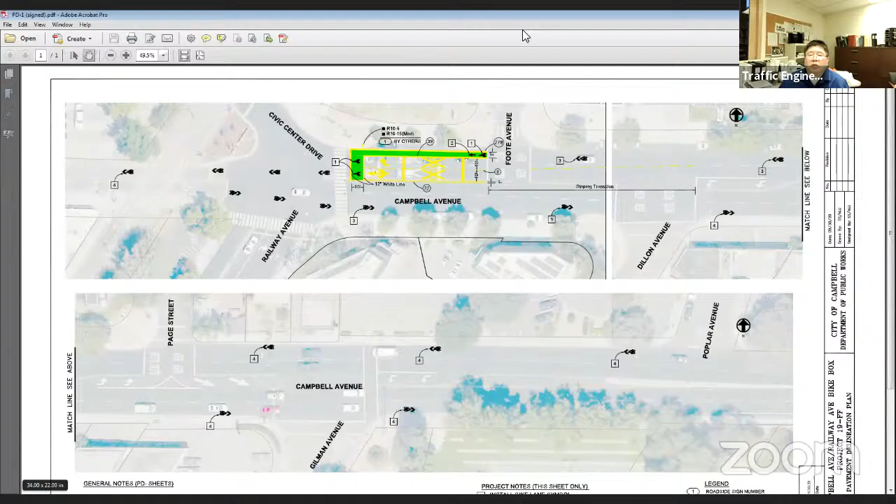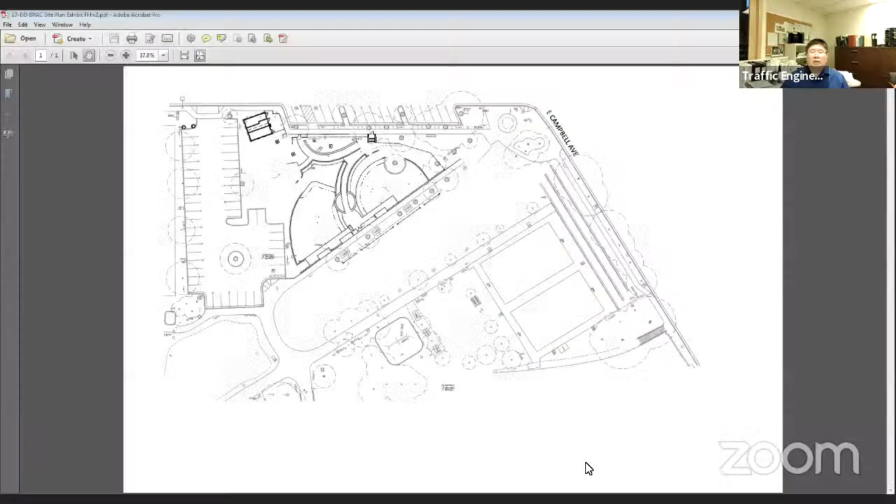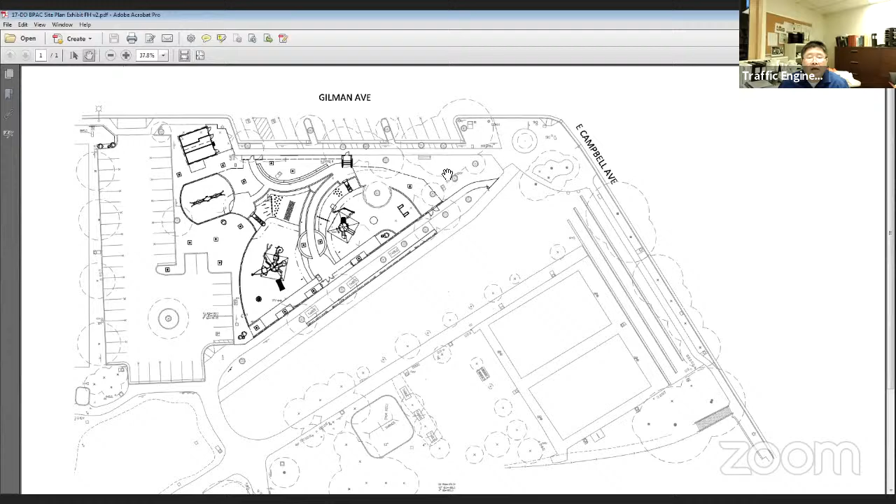And this will be for the Campbell Park, Campbell Park bicycle pathway. Okay, do you see, if this is Campbell Avenue in front of Campbell Park, and this is Gilman Avenue at the top of the sheet, do you all see that? Yes. Okay, I'm going to zoom in to show a little bit more.

What we have planned here is, closer to Campbell Avenue, there's a path that will be built by our maintenance staff that will be bike only, that will bypass this playground area. There will be a separate path for pedestrians to get to this area. And we're looking for some feedback. What we want to do is communicate to travelers that this path is for bikes and this path is for pedestrians. We were thinking of, at a minimum, having something on the pavement, some kind of marking to show the difference.

Pedestrians here versus bikes here. In between, we might have arrows pointing in each direction to make it clear that this is not a unidirectional path. You could encounter somebody in the opposite direction. I believe it's 8 feet wide. It's going to be 8 feet wide.

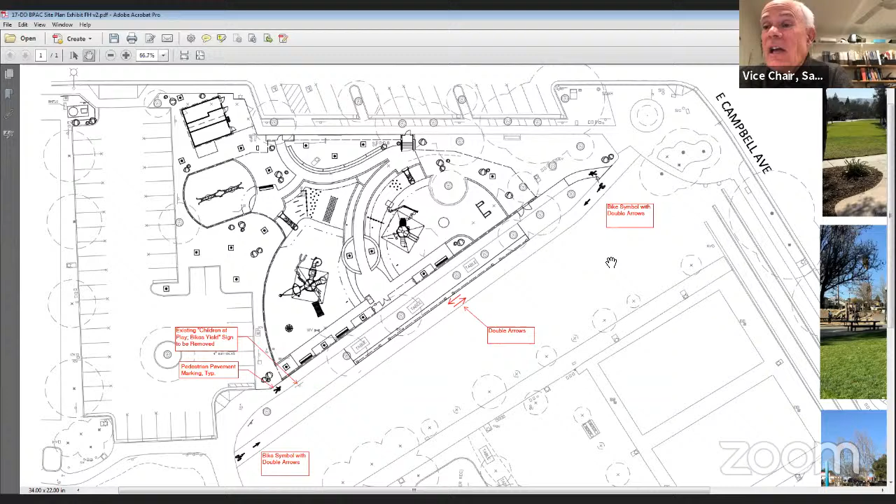So maybe a dashed yellow line. Okay, and it works for cyclists too, reminding them that it's not just that they enter, but that they stay on one side because somebody might be coming at them, or at least keep their eyes open. That's a good point.

I think I'd try it with striping, and if that didn't seem to work and you got people saying they're always getting conflicts, you could always put up a two-way sign or a bikes-only sign. We wouldn't want to jump to signage just to keep it as clean as possible and as few poles out there. But yeah, this is Barton.

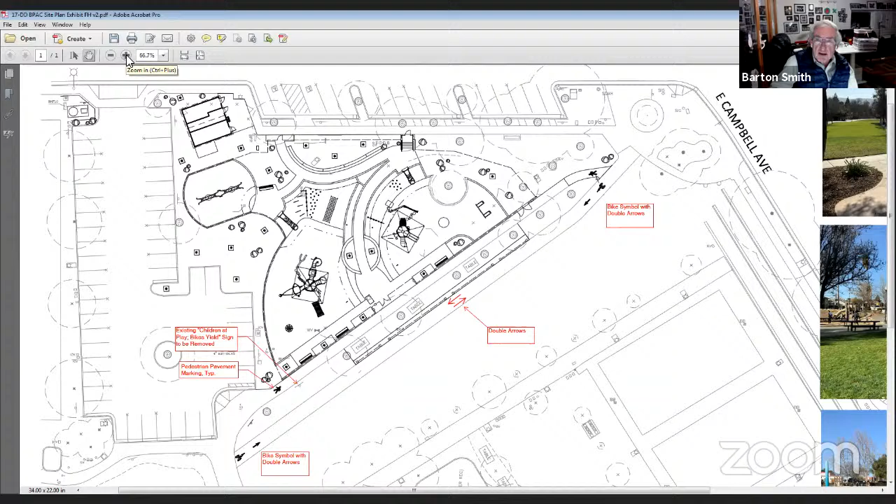So right at the upper right hand, that's where the two paths diverge. I think it might be appropriate to have a sign. In Saratoga they have some little small signs that show bicyclists this side, pedestrians that side - in a number of places. It's not that big a sign, and it's not high up like signs for cars are - it's down at eye level of pedestrians and bicycles. Right there where there's a little circle shown.

If you had a sign there, at least on that end of it, it would make the situation really obvious. It's just not shown here, but that sign would indicate: go to the right for pedestrians, to the left for bicycles.

Hey Bart, whereabouts in Saratoga are you describing? So there's one on southbound Saratoga Sunnyvale Road, not too far from where the high school is. There, I can go take a picture for you.

Basically, there's a sidewalk at an intersection, and then there's a bike lane there, but there's also a sidewalk, and the sidewalk sort of goes up above street level, and they have a little sign with a picture - bicycle on the left, pedestrian on the right. And similarly, just...

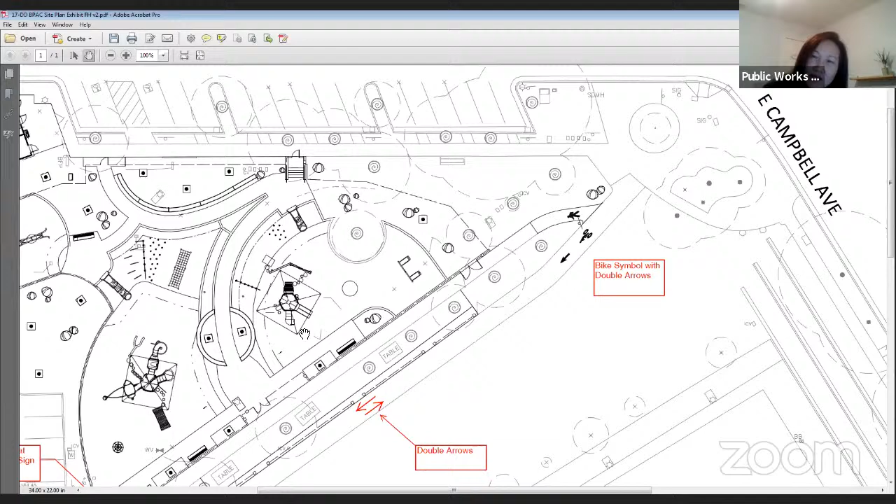It's sort of in that area, but we're actually pushing out the playground a little bit more towards the lawn area, so it's getting widened a bit. You see where the picnic tables are - that's where the existing path is. So in general, the pedestrian path is where it is, except that the playground is pushing out towards it a bit more. So what would be in between the two paths?

Right there, we have trees and picnic tables. Are those new trees and new tables? No, existing. And is there also a fence there, it kind of looks like? Yeah, there is, with gaps in between.

I'm a little concerned with that, if there are kids running around in there and then jetting out onto the bike path. So let me bring that up. The reason why there are gaps there is because there is another set of swings.

Matthew, do you think you can scroll a little bit by the volleyball area on the south, right? So there's another set of swings, and so if you have a family with kids wanting to play in two different areas, there's still a little opening for them to get through.

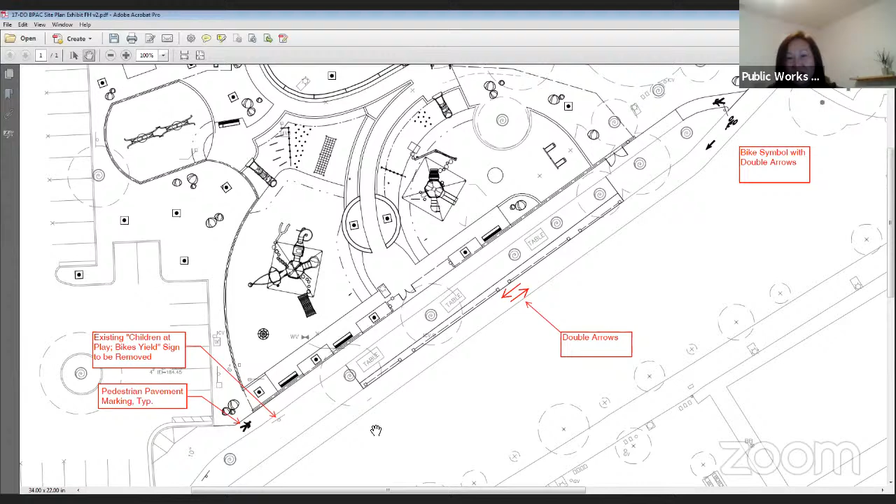I agree, I'm not too comfortable with that opening either. I don't think that's good, because if you're putting bicycles on that path only, the bicycles are going to go too fast, first off. They have their own little path. That's a slight downhill too, isn't it? I think slight downhill. To have people just stepping out, the problem is they're not going to be focused on what's coming both ways. I really think it's a bad idea to have gaps there.

I understand people are going to want to be over there, but they need to be over there, not- you know what I'm saying? I really agree too. I'm thinking of little kids, 3 or 4-year-olds who can't even see over the fence, and they run out and they're kind of hidden, they run over to the grass. I see on the creek trail, the electric bikes go too fast, and I just think this is asking for a problem.

Okay, let us look into that. Yep, okay.

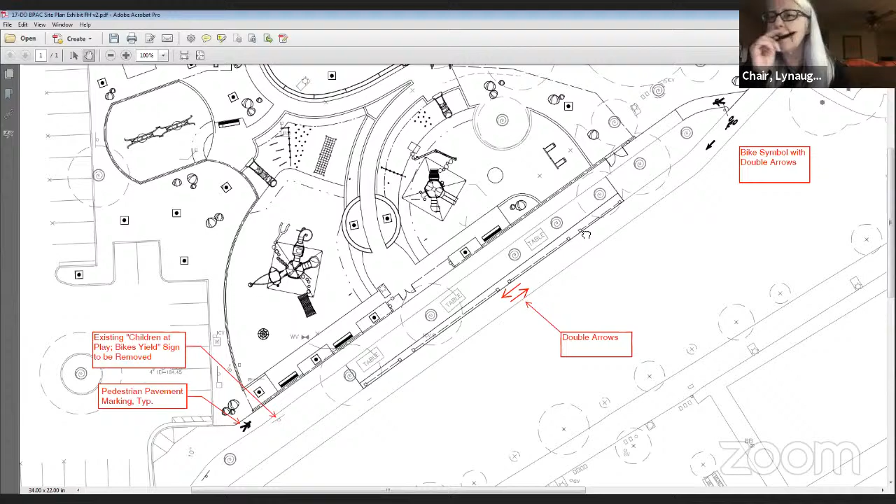The other question I have is at the intersection, so a bicyclist going north is going to take that path. Is the idea that the bicyclist is to use the handicap ramp to get off there? Is that the intention? Yeah.

Is that the access that bicyclists currently use to get into the park? Well, what I've done in the past is I've actually gone down Gilman Street and gone through the parking lot, rather than deal with the situation here with the pedestrians in the play area.

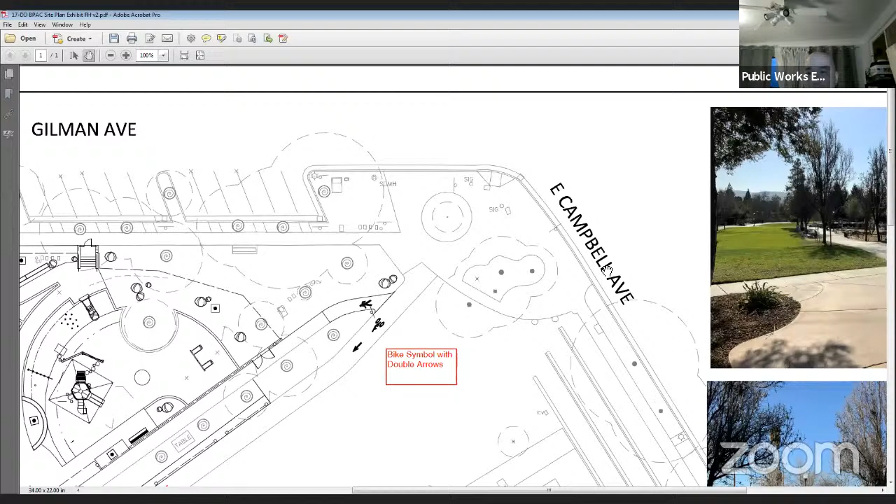If I may, there's some photos of the existing condition that might help for those that may not be as familiar, to get oriented. You can see on the very right here, the top right picture is standing at the corner looking down toward the play area, and that's the existing path. You see that path is definitely wider right now than 4 or 5 feet, I can't remember, maybe 6, maybe 8 feet wide right now.

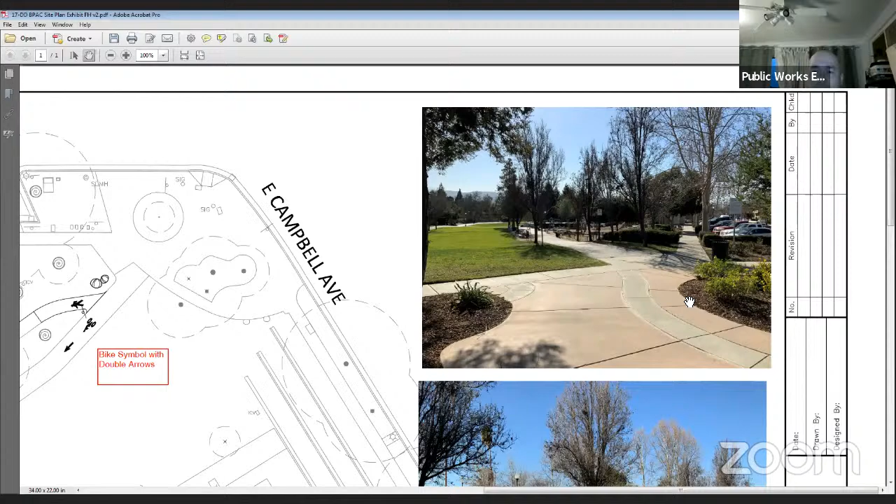I can't remember exactly, but like Amy said, the point we're trying to do here is taking- and the problem with this path is, of course, it runs along the existing playground, right at the edge of it. So if you pan down a little bit, please, you can kind of see where the existing trees and existing picnic tables are, and then the other side is the path and the playground.

Scroll down one more picture, please. This may be a little bit better. So here's the situation, exactly like you guys are saying. Right now, there's a potential conflict with kids just running back and forth, even just to the picnic tables, and that's why we want to take this opportunity to separate the pedestrian and the bicycles, however we can do it.

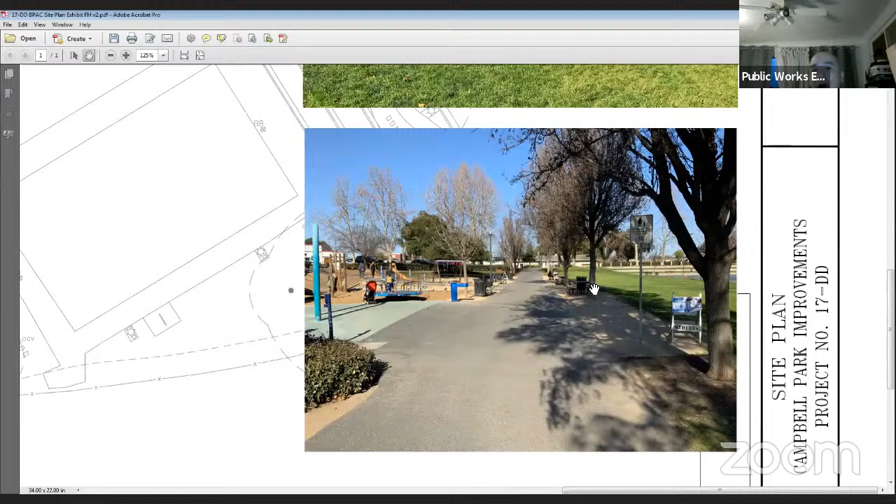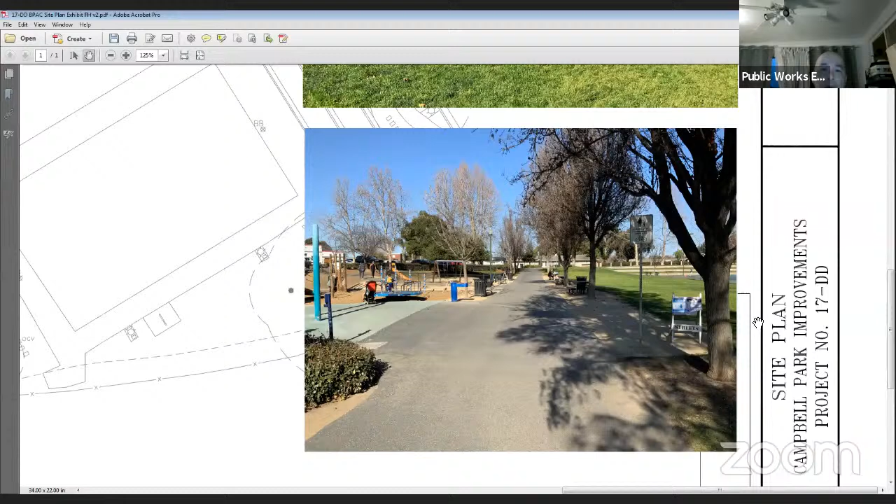Your point about the new path also presents some challenge too, because people still need to cross a new bike path. But that's really the background of why we wanted to have this separate path out there, because right now there's a good potential for collision, conflict out there right now. So anyway, that's a little bit more background, hopefully, to add to your thoughts and your consideration.

Will there be another opportunity? When would the design be ready?

The yards crew is looking at the path itself being regular asphalt concrete path, trying to get away from this unpredictable weather that we have, 70 degrees last week and dropping back down to 50 next week. Probably sometime in March or April when the weather stabilizes itself a little bit, so we are looking to try to...

Formalize and finalize this design probably within a month or so that we can get ready and schedule the crew and so forth. The other thing too, a little bit of an interesting tidbit, is there's a sliver of county land that we're actually borrowing right now as part of the park.

So this new bike path kind of cuts through, and even now it kind of cuts through the little county area. So we do have to go to the county to make sure they're okay with whatever we do too. They've seen it, they know that we're building this bike path, so it's a matter of just working with them.

So how soon would the other improvements go in after this bike path is in? And what's the plan for the interim? Yeah, so the sequence will be the new bike path goes in first.

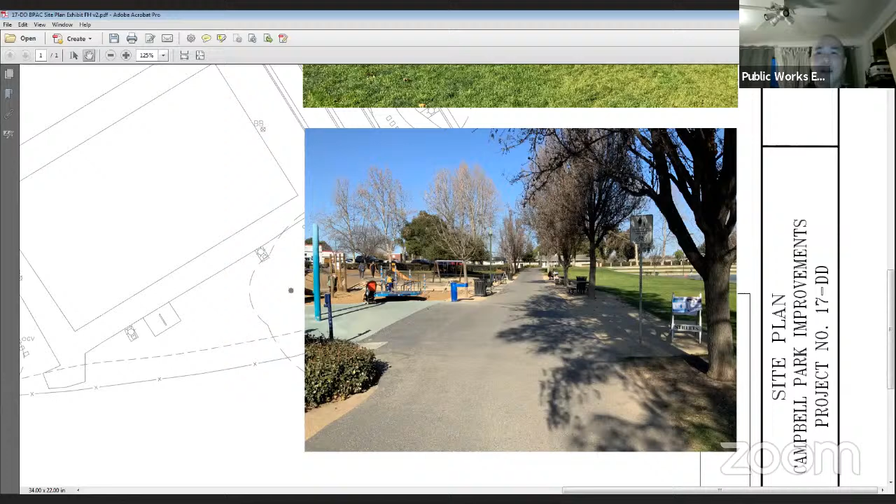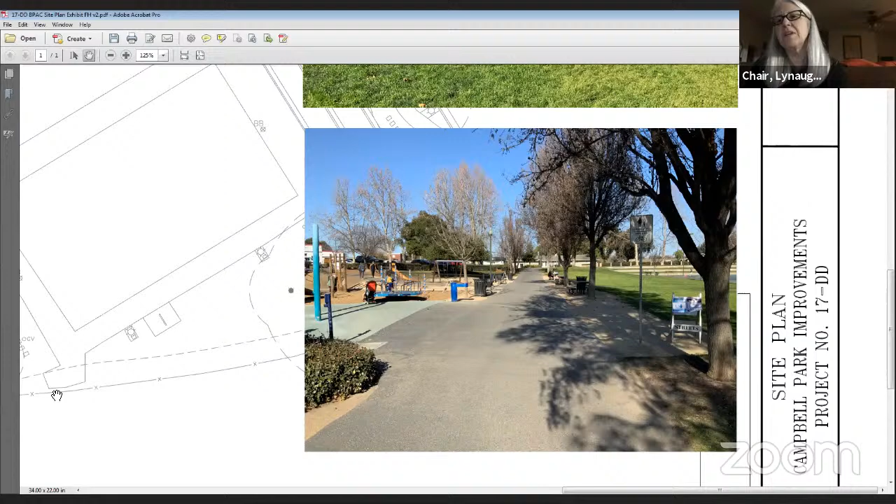And maybe to that point, once whoever's on the new path enters back into the southern turn where it joins the existing path, it's all going to be mixed use anyways. So it's really a bypass, it's a bypass for bicycles and pedestrians that don't want to be where you probably have a bunch of kids and families and other activities.

It's really a bypass, which makes a lot more sense to me too, because I looked at that and thought that's a lot of green space you're taking away. So what's the trade-off? I guess you kind of grow the size of the play area by allowing people to bypass, rather than taking that park space away by adding something exclusive for bicyclists, which a lot of people wouldn't be happy about. So if the playground grows in size, that makes a lot more sense to me, and having it multi-use.

And so then maybe the pathway closest to the play area, you're going to have little kids on bicycles in there, probably with pedestrians just because of the play area, I suppose. I don't know. Yeah, so that we anticipate, strollers, bikes.

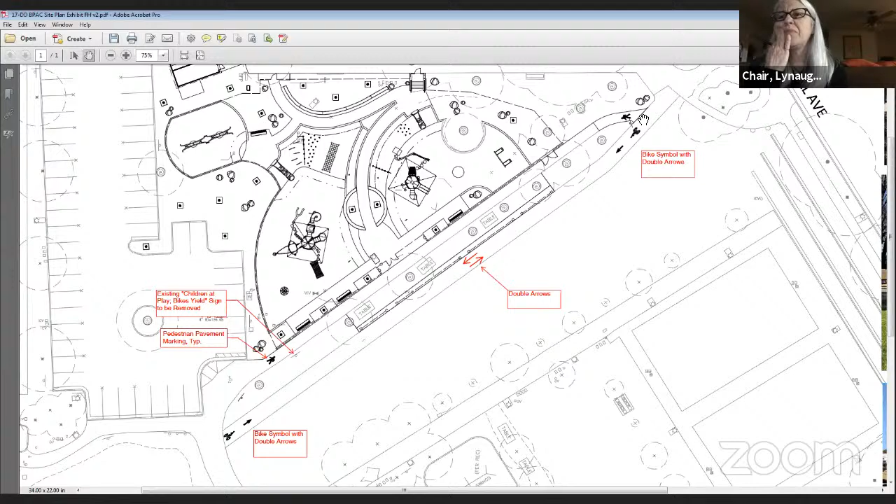This is really more of just an extension of the creek trail than anything else. So this would be like rerouting the creek trail, just creating more space for the playground and then allowing people to travel around it.

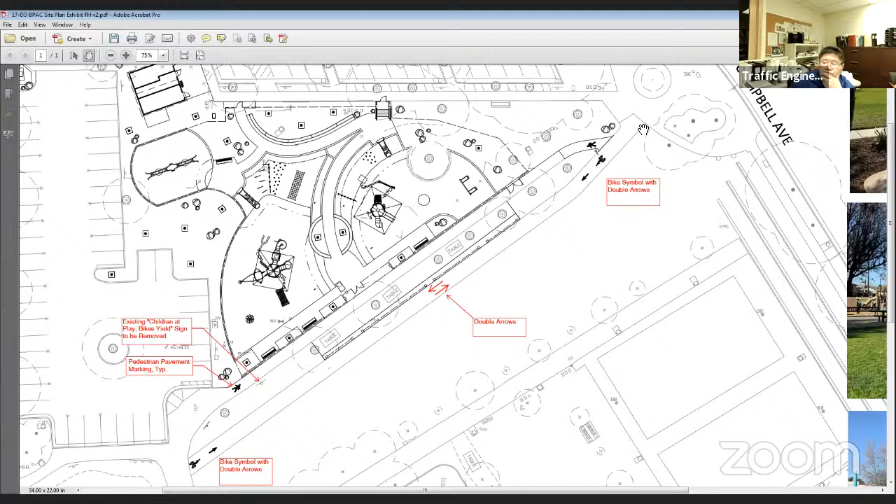The question that raises in my mind is, I thought I heard 8-foot width, and if we're really going to be having people with strollers and dogs and so on, is that the right width? It sounds a little narrow to me if it was 8 feet, and this is going to be a very heavily used segment, obviously.

What's the typical width on the creek trail? Do you know, Matthew? I think right now it's 12 feet. Well, it would certainly be slower if you only had 8 feet. We've got some pinch points on that creek trail though, where it goes down considerably narrower than 12 feet in some sections. It's probably 12 feet if you count the shoulder on either side, particularly on the section that runs along the east side of the creek, there's almost like a running path alongside of it. So when you add the shoulders up, I think you're closer to 12, but I'm not sure the section is consistently 12 feet throughout that trail.

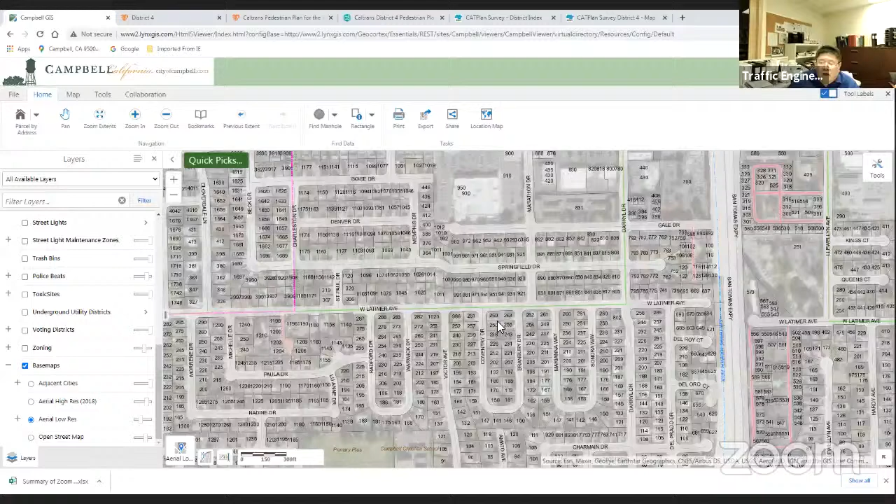Now the street is, I believe, 40 feet wide, which is just wide enough for 2 lanes of traffic, 1 in each direction, and parking on both sides. What we were thinking can be accomplished is to have sharrows between San Tomas Aquino Road all the way to Darryl. We do have sharrows on Darryl north of Hamilton Avenue, so what we were thinking is continuing or connecting whatever's done with the paving project on Latimer. Our city crews would install sharrows so that there would be a connection to the existing ones north of Hamilton Avenue.

Any feedback thus far? Or any questions? Yes, Matthew, this is Barton.

So how does that street fit into our overall transportation plan as it relates to bicycles? It is included in our general plan as a proposed bikeway. So it is part of the plan. All right, yeah, it makes sense then. Yes.

Overall, I'm going to pan over to the east. We're thinking eventually to have something similar on Llewellyn Avenue, and then continuing eastward on Latimer Avenue past Winchester, so you can connect to Winchester, and even possibly going to Central Avenue. We haven't really decided yet whether to go with bike route signs or sharrows or both. What's your feedback?

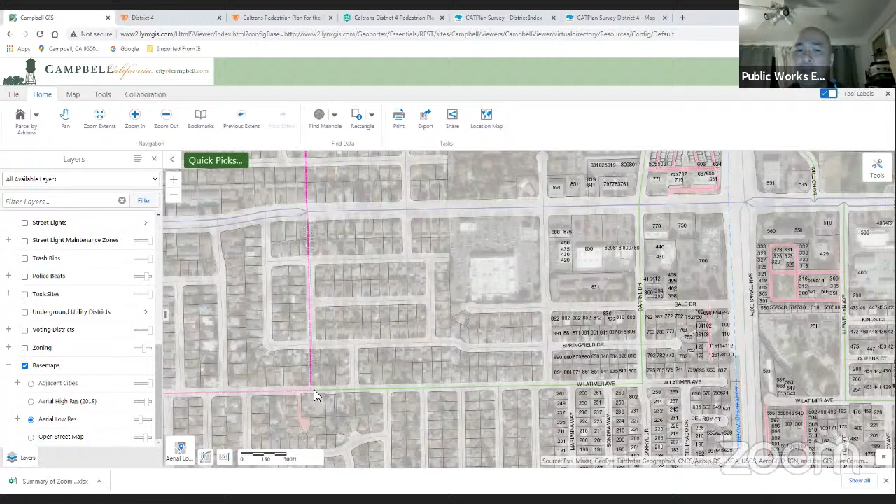No, I believe the only street that's being worked on is Latimer, between Darryl and San Tomas Aquino Road. That's correct. Actually the stretch of Latimer between San Tomas Aquino Road up to the city boundary, shared boundary, will be overlaid, I think. And then the city's own project coming in, I believe, is a rubber cape seal up to Darryl.

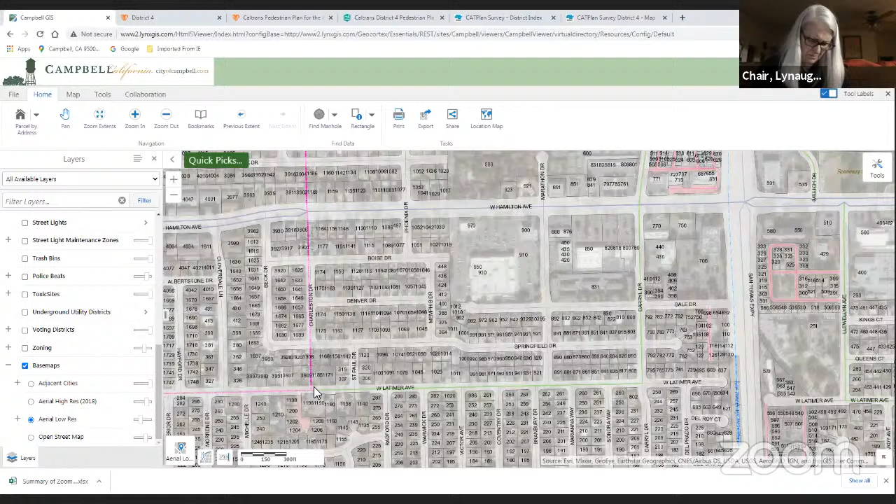Yeah, I too like the striping, but if the city ever had a bike boulevard program, then I think signs would be appropriate just to reinforce that you are in fact traveling on these boulevards. But until that happens, striping would be best.

Okay, I'm hearing overall sharrows are fine, and maybe that's the way to go. It is a long stretch. Yeah, okay.

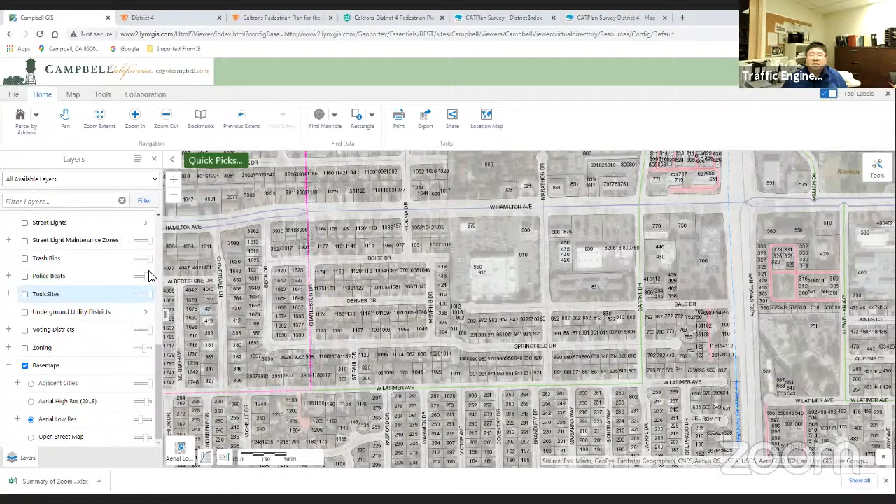Item number 6 is Dell Avenue. This is an interesting one. Let me unshare. And by the way, we got some preliminary feedback from the previous BPAC members, and thanks for providing your feedback—it was very helpful. Let me share this.

Here it is. Now, do you see? Oops. Yeah, we see Dell Avenue now. Okay, oops.

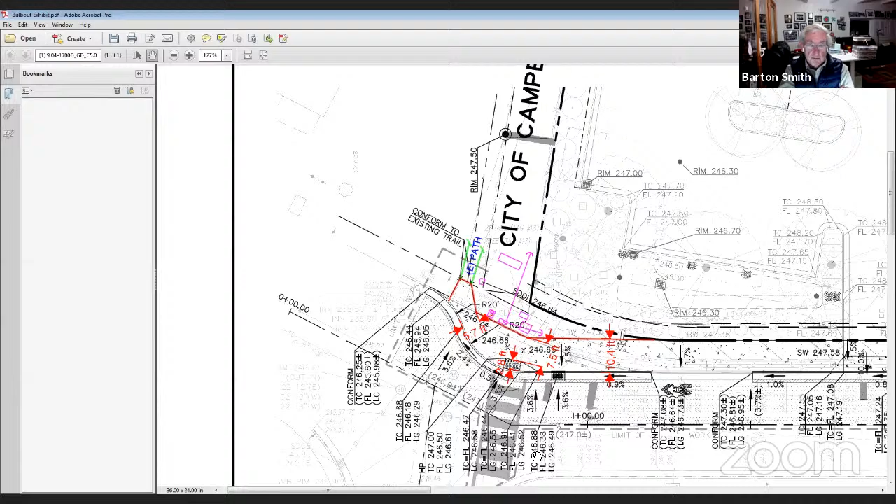This is the portion of Dell Avenue close to the southern edge of Campbell. There's a cross street, Division Street, which is parallel to Knowles Drive in Los Gatos. So we're getting towards the southern end of Dell Avenue. There's an existing marked crosswalk that provides access to, and there's an existing curb cut here that allows bicyclists to get onto an asphalt concrete path that leads to the Los Gatos Creek Trail further east. And there's a development just south of that path.

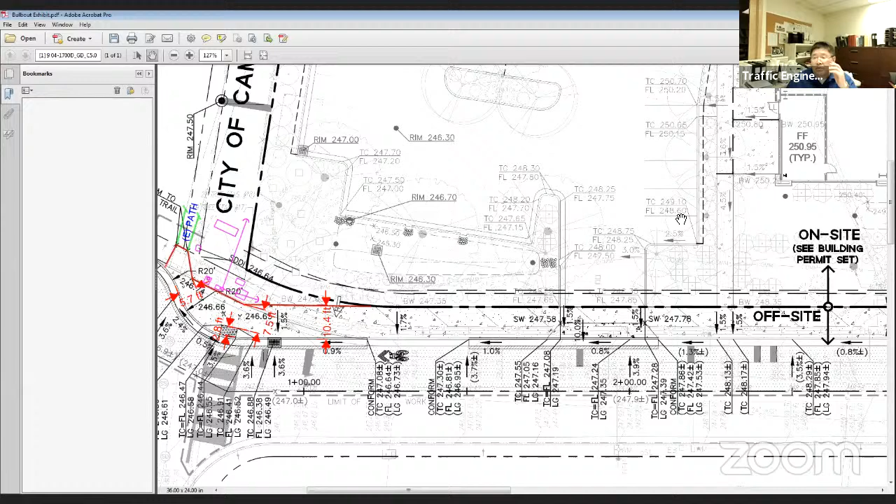The address is 1700 Dell Avenue. They're going to replace the existing office building with a new office building and parking garage. They are providing some improvements, including sidewalk, curb, and gutter along their frontage on the east side of Dell Avenue. We were looking at replacing, currently there are what we call channelizers glued onto the top of the pavement that push traffic away from the curb so it's easier for traffic from the driveways to see oncoming traffic, because the alignment of the street, Dell Avenue, instead of being a smooth curve, is an angle point.

And it was very difficult for people to see traffic on Dell Avenue, which travels at pretty high speeds. So some of the feedback we've been getting thus far was that there was going to be a pushing out of the curb line, sort of like a bulb out, that would shorten the crossing distance in the crosswalk, and there would be a curb cut with your standard curb ramp with the detectable surface in the middle. So we posed the question: is this enough, or would having access to this AC path more directly from here work?

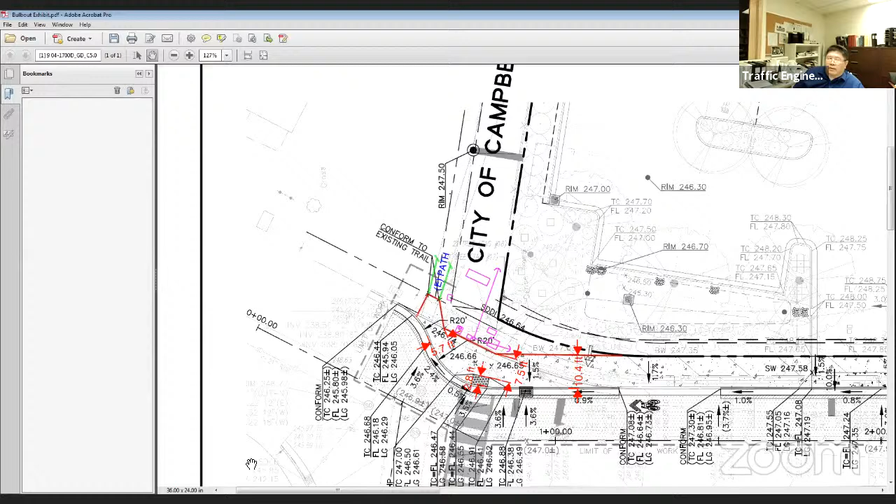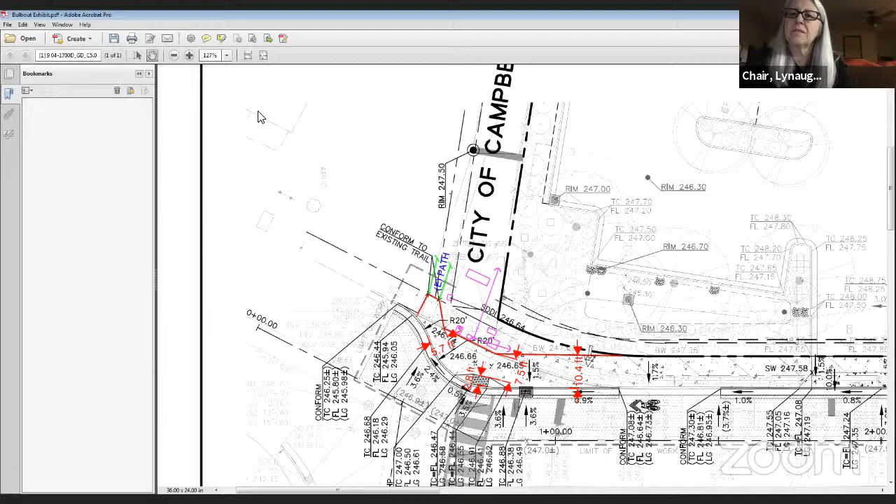Rolled, but don't you still have to come up 6 inches because your curb height, with your ramp, you're coming up 6 inches to the level of the sidewalk? So you still gotta somehow... right now that pathway ramps down to the lip of the gutter, basically, right? Right. So if you could zoom in a little bit tighter on that, you've got to make up the 6 inch difference because you've got the handicap ramp for the crosswalk.

Unless I'm not seeing a plan view or an elevation view, it's really hard to see what's going on here, because basically they're putting in a curb and gutter. The sidewalk is going to be 6 inches above the street. The handicap ramp takes care of the 6 inches there, but where the path is, what exactly is going to go on there? A roll curb doesn't really get you any height, but this walkway's got to make it over to the pathway because people are going to want to walk there. You see what I'm saying?

Yeah, so we're looking at a design where it's kind of somehow transitioning, so the roll curb idea is going to be a little bit of a non-traditional roll curb, but at the same time we don't want that entire area to be open, right? Because we don't want any cars driving on it. So we don't want it.

So there's going to be some sort of transition after the ramp. We're going to start the roll curb, and we're going to have to work on it being a little bit depressed. Then at that point where the red line is, it transitions back because to the north of it, it becomes a traditional 6 inch curb. So there will definitely be some design work we need to do on this, but we wanted to ask all of you what you thought about a rolled curb situation. Would that be something that, from a bicyclist standpoint, you can ride on to access the path?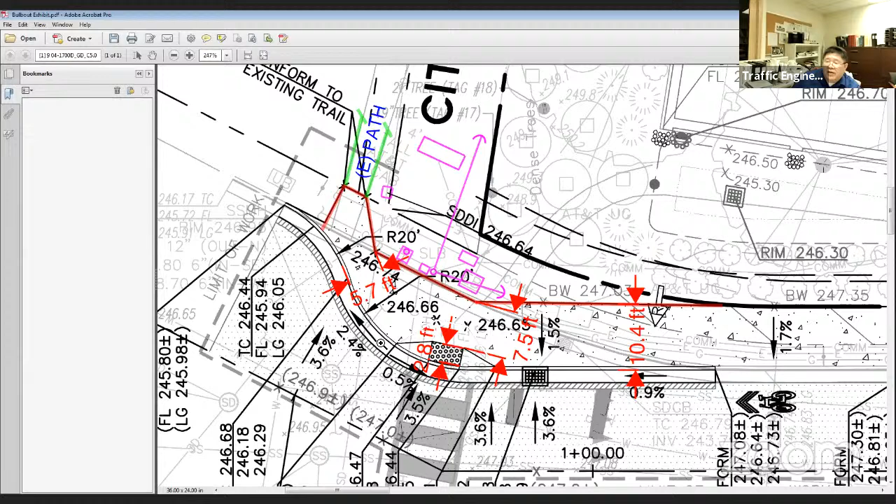Yeah, similar to in the past, we've asked about riding over speed humps. In this case it's the rolled curb. I'm sure it'd be fine. You're traveling at a slow enough speed, so it's going to be a non-issue for most people.

I don't have a good picture of the rolled curb in my head, but I use that path a lot during normal times when I'm doing club rides riding over to San Jose, and that's where I go through to either go south on the Creek Trail or cross the Highway 17 overcrossing. So I'm coming south on Dell and turning left there.

Especially if it's like people going to work time, there's traffic on that road, so I'm not slowing down on the road too much to make that left turn. In fact, it took me some practice to get good at actually being able to hit that thing well enough, it's a little dicey. Let's say I'm going 10 miles an hour at least when I make the turn, and I don't always stay on the pavement, I sometimes get myself over into the dirt a little bit.

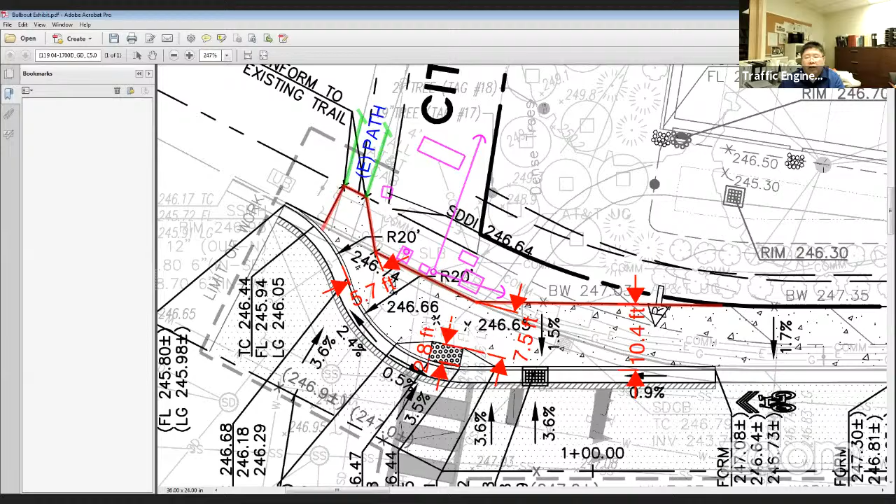And Matthew, if you could find us a place somewhere in town where there's one like this, that would be there, we could go try it out. Yeah, I can't think of one off the top of my head.

I really don't know, it hasn't been engineered yet. I think what we need to do is have it looked at by the engineers further. With a roll curb, it's going to depend on the height, how easily it will be able to be used. And having a plan view like we have is good, but we really need an elevation to see how everything relates, because right now that pathway drops right down to the street surface—it's a very steep little ramp, very narrow at 5 feet.

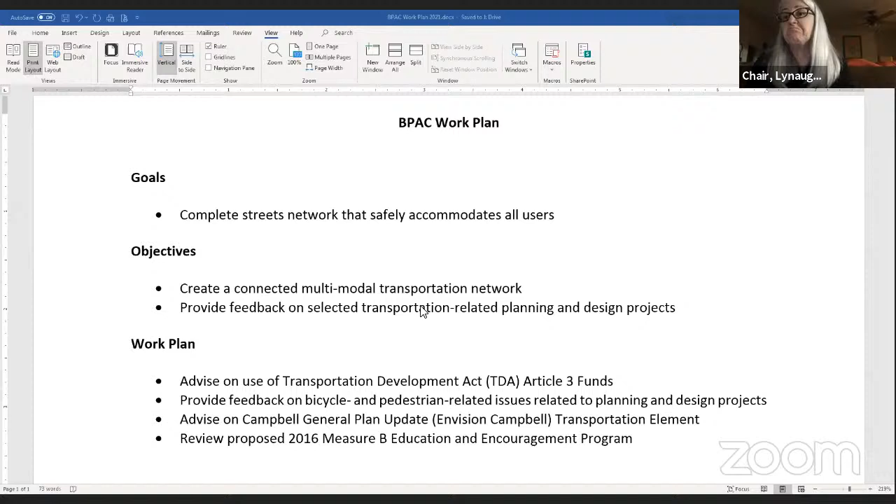Okay, what we can do is propose this. How we implement it can be worked out in step with what the mayor is looking for in terms of collaboration. Maybe under the objectives we just add something about being collaborative with other commissions and committees on related projects. Otherwise I think this is a great work plan to start with. If we add something like that, it kind of goes right to the point that the BPAC is on the ball, that we don't work all by ourselves in a little bubble, that we're considering everybody else.

All right, I think if Matthew makes that change, and if everybody is largely in agreement, I think we have something we can work with and get to council. That doesn't mean you wouldn't also have the opportunity, if council has feedback or asks questions, to revisit this at the March or even May meeting as we put together our work plan for the upcoming year. So I think this is a great start.

Yeah, looks good to me. I think it'd be worth revisiting a little bit. What jumped out at me immediately was the first objective just sounds like a goal. I wish we had the ability to create a multimodal network, but that sounds almost the same as complete streets network that safely accommodates all users. So just an editorial comment, I guess.

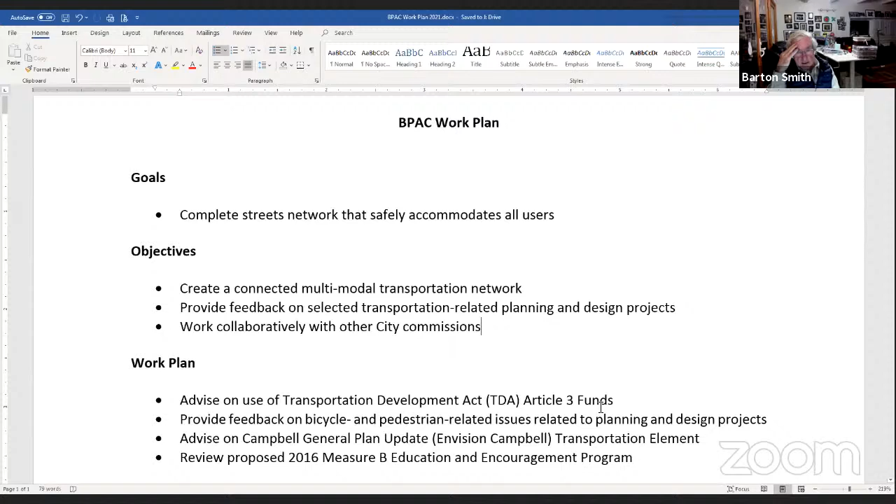Sure, yes. So in addition to the Measure B things and the Transportation Development Act, we also discussed other grants we can apply for sometimes. Is that included here, to advise on those? Maybe just expand the first one to TDA and other grants as available. That's a good comment. This is first draft theater here. Let's see—advise on grant opportunities that exist, how about, for example? Yeah, there we go. Perfect, perfect.

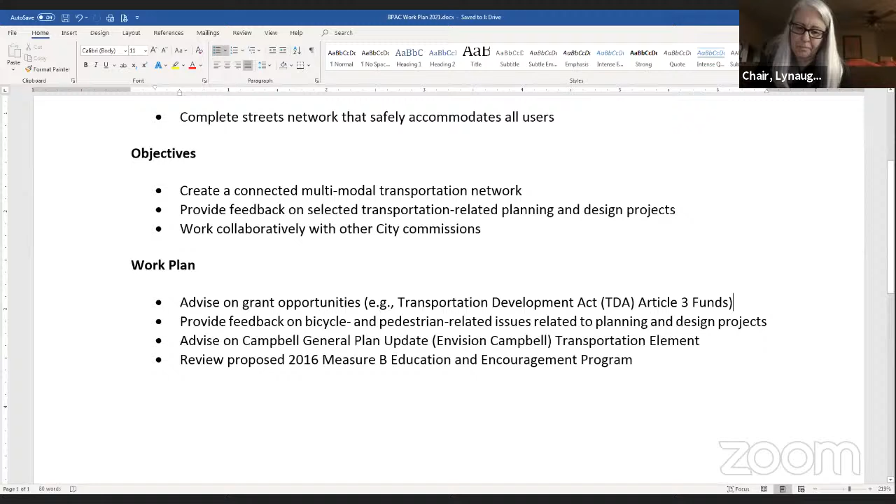Sure, so the VTA BPAC has met every month for the past couple of months. A couple of items came up this time: Caltrans District 4 has prepared a pedestrian plan that's out for review right now. I sent Matthew some website addresses, so maybe follow up with an email tomorrow with those addresses if anybody's interested in looking at them and making comments. It explains on the website how to do so.

They also have a bike highway study that District 4 did, looking at potential bike highways, where bicycles may be able to be put. That's another study you can take a look at, and if you feel like making comments, you can make comments.

The other thing that came up was the Silicon Valley Bicycle Coalition gave the results of a survey of Silicon Valley on cycling travel behavior and travel attitudes. It's a study you can go look at to see what they found. Keep in mind that quite a few people in the study were not really avid bicyclists, so it's information about perceptions of what's going on out there and how people feel about cycling.

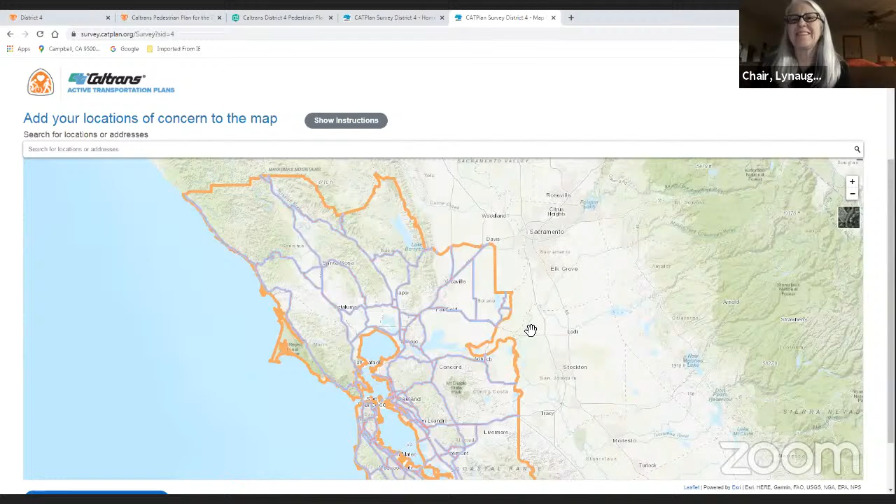Let me just click on this, see what happens. Okay, it walks you through a survey. There's also this concern map where you could zoom in, and it says show instructions. I think you click, and at the location where you have a concern, you can start interacting with the survey to tell Caltrans what issues you have.

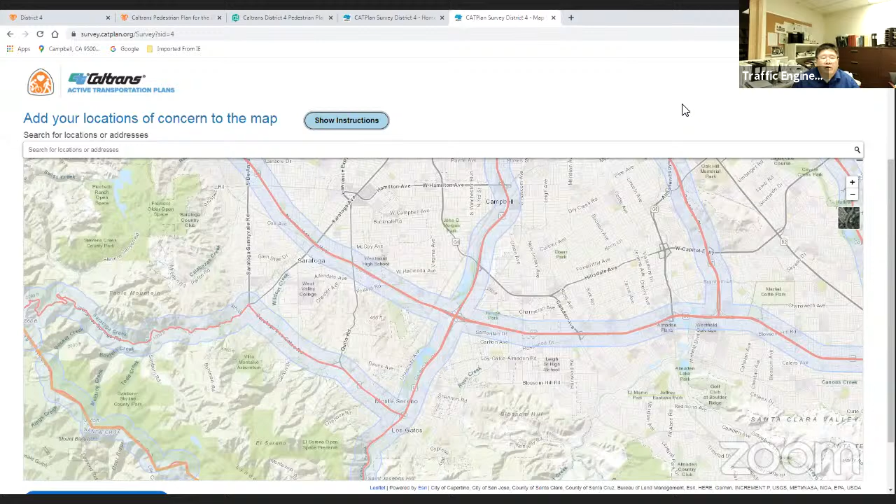Item 9, around the table. Comments or discussion? This has been an exciting meeting, by the way. Yeah, it's a good introduction to Matt and Mark.